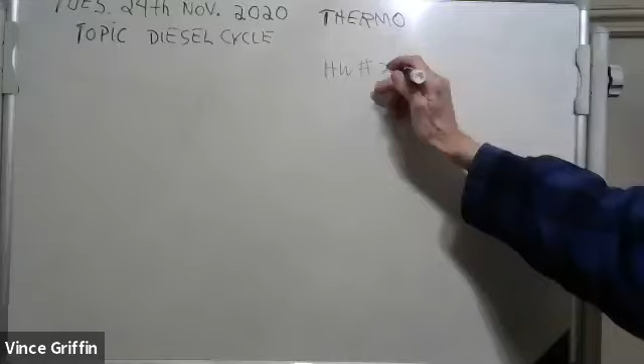Yeah, well, here's what I thought, there was a confusion about this. Homework number 24, I thought it was problem 917. And homework 25, I thought was 106E, 9106E. And problem 26, I don't know what happened.

I'm just not happy with doing this online stuff, I was a lot happier before we had to do stuff online. But that one was 965. I'm coping the best way I know how here. You just skip the homework number 24, that's it. But we still submit you the same homework, 917 and 106, but on a different homework number.

Okay, well, if you feel like you've been shortchanged, email me and we'll fix it. Okay, all right, anything else?

Okay, well, we're going to do a diesel cycle, but now which one? I wanted to do a diesel cycle. I'll tell you what it is. It's problem 10, chapter 10, 122E. That's what we're going to try to do.

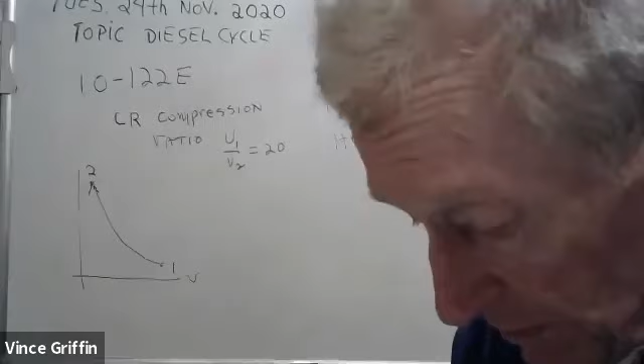Now remember, the diesel cycle, on a PV diagram, you want to start off here with your compression. This is your compression stroke. Use the numbers that they use in the book, this is how they do it, and if you change the numbers, you'll get me all confused, so just do it the way the book does it. There's your compression stroke, and this is the burn, it's an isobaric burn to state 3.

There's state 1. And then what you have is your power stroke. You get a little bit of power out of your burn, because that moves your piston some, and you get some power out of the burn there.

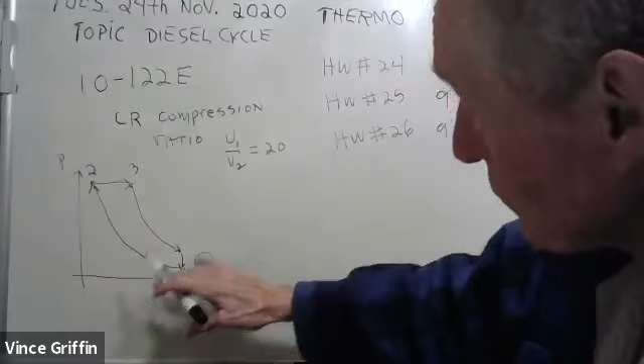See, on a diesel engine, you got a lot of compression. This is 20 to 1. V1 over V2 is 20 to 1. The compression really goes up, so much so that it heats it up and makes it hot, and that explodes the diesel. That's what makes the loud banging sound. When a diesel goes by, they're loud because it's exploding that diesel fuel.

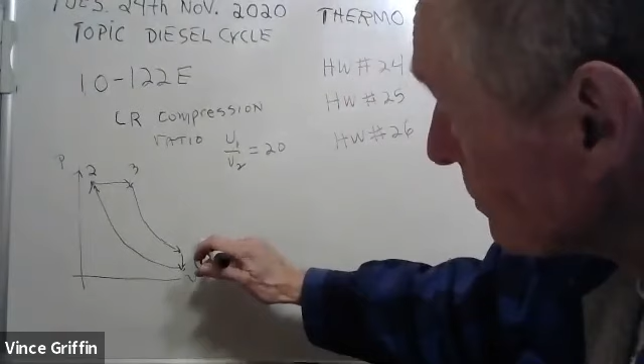And you have an isobar from 2 to 3, and then you have your power stroke. And then they model the exhaust intake as an isochore. This is the exhaust.

This is your power stroke. This is your burn. This is your compression. See, these two are adiabats. They're adiabats. These two are adiabats. This is an isobar. It's an isobar. And this here is an isochore.

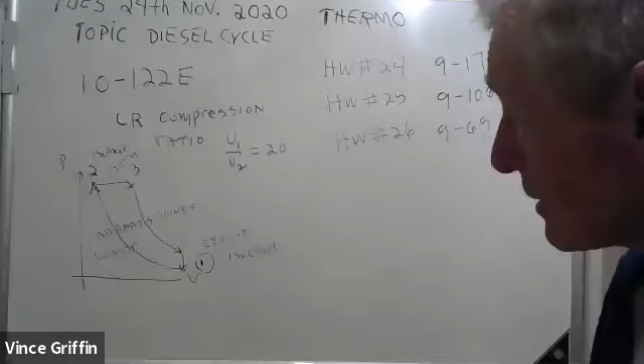So there's your diesel cycle. And we're going to read this. It's 10122E. And it says the inlet is 520 Rankine. Well, let's get some red here. If you drew the isotherms, that's 520 Rankine. We're in English now.

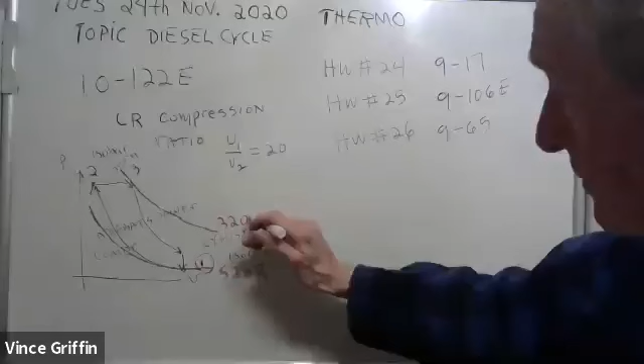And do you notice that the adiabat is steeper than the isotherm? Adiabats are steeper than isotherms. Write that down. And see, this here is your hottest temperature. And do they tell you what that is? Yeah, 3,200. This is 3,200.

Rankine. That's your hottest temperature. Let me keep reading here now. Maximum pressure, 920. They said the maximum pressure here is 920 PSI. So we've got our isobar there. The pressure will be the same at 2 and 3.

Well, that's about it, guys. We're ready to do our problem now. And what we're going to do, if you have any problem with these, email me. We'll figure it out. I need the space here.

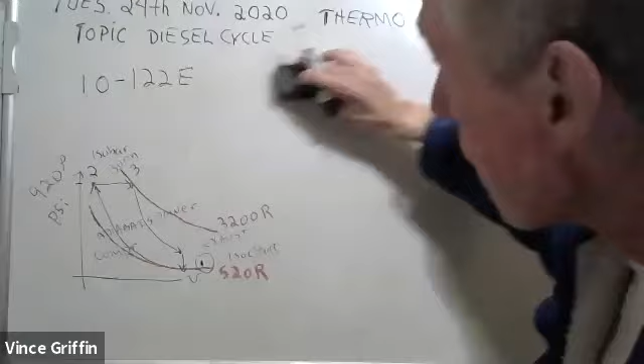We're going to make our table now. Here we go. We're going to have P, V, T, delta U, Q, and W. And we'll have process 1 to 2, 2 to 3, 3 to 4, and 4 back to 1. It's a cycle.

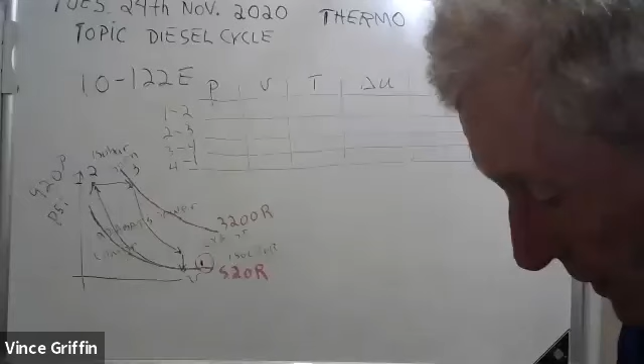And let's put the units in there because units are important. These are PSI. These are cubic feet per pound mass. We'll do these in Rankine. This will be BTUs per pound mass, BTUs per pound mass, BTUs per pound mass. And you all remember what a BTU is.

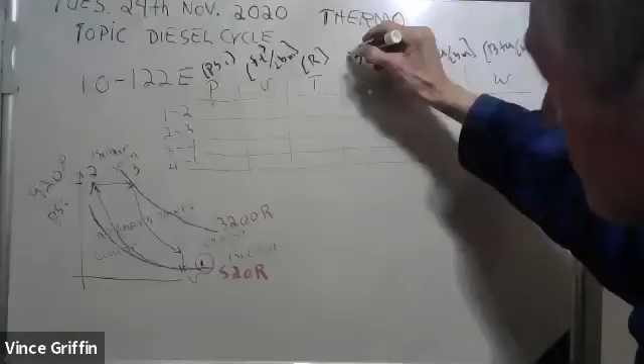A BTU is the amount of energy needed to heat 1 pound mass of water 1 degree Fahrenheit, or Rankine, same difference.

All right, well, some of this stuff is known. If you'll read what they said this is 920. The pressure at 2 is 920. See, these are all the initial values. Put a little I on all that if you want. The initial value of the pressure going from 1 to 2,

we don't know. Don't know what that is. They don't give it to you, do they? Let me read it again here. And we're doing 10-122E. No, they don't tell you. Well,

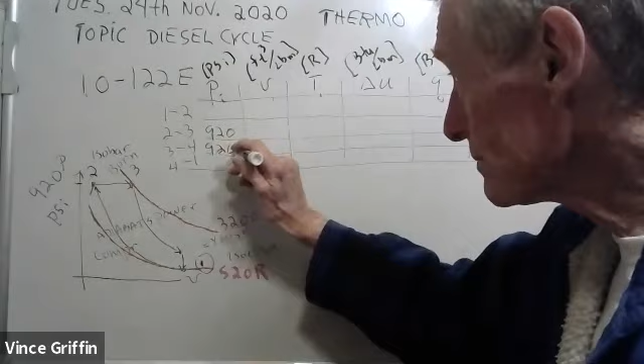they do tell you what the initial pressure going from 2 to 3 is. Going from 2 to 3, the initial pressure is 920. Okay, 920 PSI. Hey, you know what? The initial pressure going from 3 to 4 is also 920. There's your isobar. So we've got that.

Now, what else do we know? Hey, wait a minute. Going from 3 to 4, the initial temperature is 3200. So that goes right here, 3200 Rankine. Hey, looky here. P3V3 is equal to RT3. We can figure out V3.

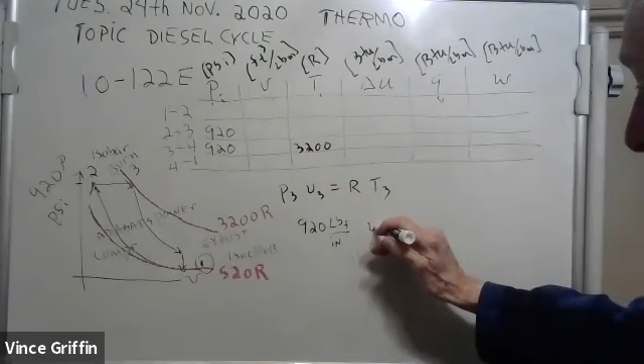Okay, well, let's put in our numbers and do it. So this is 920 pounds force per square inch. That's what a PSI is. And this V3 will be in cubic feet per pound mass.

Now the R is 53.34 foot-pounds force, pound mass Rankine. And the temperature at state 3 is 3200 Rankine. So look here, we know everything.

We can find V3. But there's a dirty little catch. If you forget this 144, you won't get the right answer. You got to go 144 square inches is a square foot. Then you'll get the right answer. All right, I'm going to shut up, and I want you to find V3 for me.

And then I'll call on somebody. Go for it.

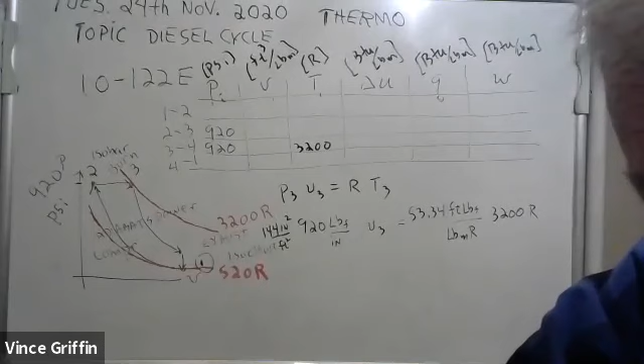Now let me go to my friend Alex. Alex, unmute and say hi, please. Hello. Hey, Alex, do you have this specific volume at state 3 for us? I got 1.28841. That's what I got. I got 1.288. That's probably enough accuracy there, Alex.

Now, I put it in the wrong place, though. I goofed up. It goes here. I goofed up here. But hey, I caught it. You don't get a thank you point when I catch it. You got to catch me.

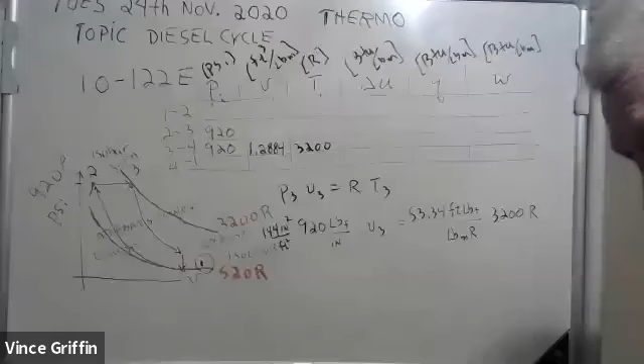There you go. Now we did good. We got that. Now what? Hey, what about these adiabats? I need to put some zeros in here. Let's pick on my friend Alex again. Alex, you did good on this little V here. Where do I put my zeros for my heat transfers, Alex?

Would it be at 1? Yeah, 1 to 2. See, going from 1 to 2, look here Alex, 1 to 2 is an adiabat. There's no heat transfer. What's the other one, Alex? 3 to 4. Yeah, it's going from 3 to 4. Good going.

Now, one of these work per masses is 0. Let's pick on somebody else. Braxton, unmute and say hi. Hello. Hey Braxton, one of these little work per mass deals here is 0.

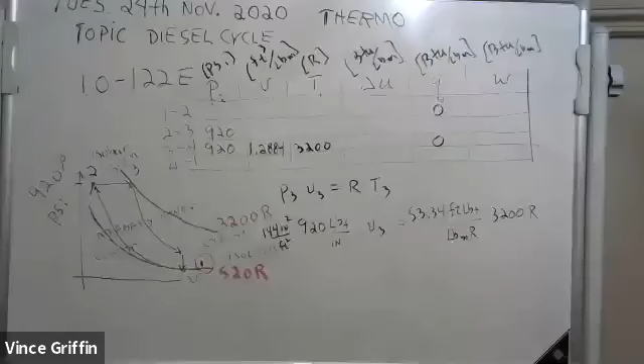Which one is it? I'm gonna guess 4-1. I like it. I forgot to put my 4 in there. There's state 4, and there's state 1, and there's no work done. Braxton, how come there's no work going on that?

Because it's exhausting, and on a PV diagram, I feel like you need to go left or right, and the work under it is. That's right. You got it. Yeah, exactly. You got to go left or right to get any work done, and it's just going straight down. It's called an isochore.

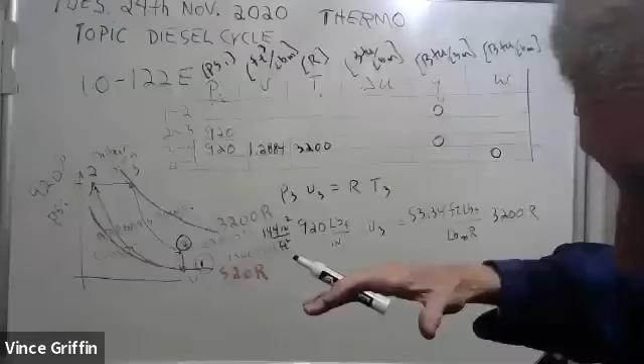The piston started and ended at the same spot, and we're treating it as an isochore, and so you get 0 work done. In reality, the engine really turns over physically 360 degrees because the piston comes up and you have your exhaust, and the exhaust goes out, blows some smoke out there, and it stinks. And then the piston goes down and it sucks in some diesel fuel. But we're treating it as if it's an isochore. Thermodynamically, it's an isochore. Physically, it's not.

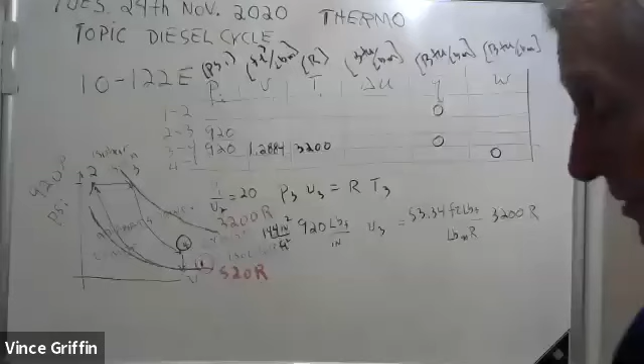Okay, well, we're coming right along. Now, they said V1 over V2 is 20. Is that going to help us any? Let me write that down. That's called the compression ratio. Nah, that's not going to help us any because we don't know V1 or V2. Never mind that, it was just a thought.

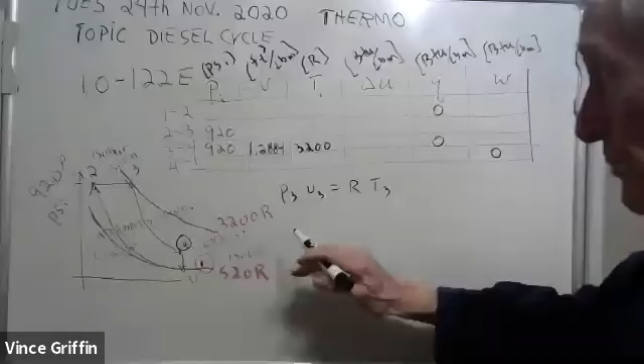But let's see. At state 3, we've got an adiabat to state 4. So we can use an equation that we know and love. I need to make some room here. We're doing an ideal diesel cycle. We're assuming each process is reversible. And this is an adiabat, or reversible adiabat. And reversible adiabats have a special name.

And I'm going to call on one of my excellent students here. We've had this before, but you might have forgotten. Brian, unmute Brian and say hello, please. Hello. Hey Brian, there's a special name for reversible adiabats. What is it? It's something like ison. You got it. By Jove, he's got it. It's isentrope. Okay, and what it means is the delta S is 0.

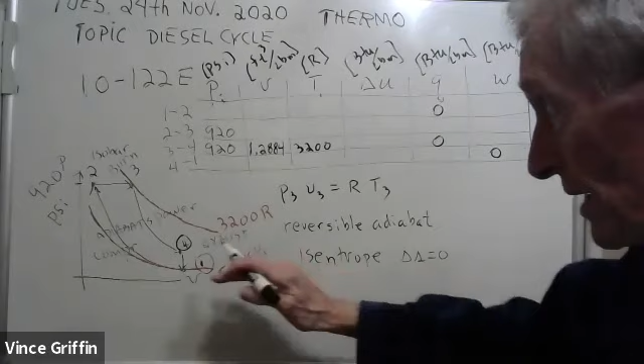Delta S is 0. Well, so what? There's no S's on here. But wait a minute, we've got an equation for isentropes. If you have an ideal gas, and did you know we're dealing with air basically? So T4 over T3 is equal to P4 over P3 to the K minus 1 over K, which is equal to V3 over V4.

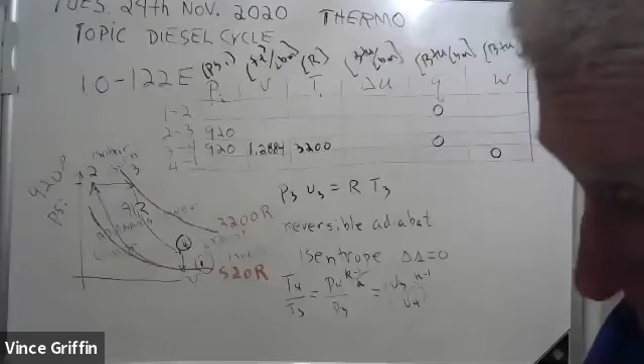If you don't have this equation written down someplace, write it down. It's a nice equation, but be careful. It only works for an isentropic ideal gas, which we have. We've got an ideal gas. It's air. At these temperatures, air behaves nicely.

Now, do we know T3? We do. Do we know T4? No, we don't. Do we know P3? Yeah, hey, we know P3. Do we know P4? We don't. Do we know V3? Hey, we know V3 and we know K, right? We can look it up. Do we know V4? We don't.

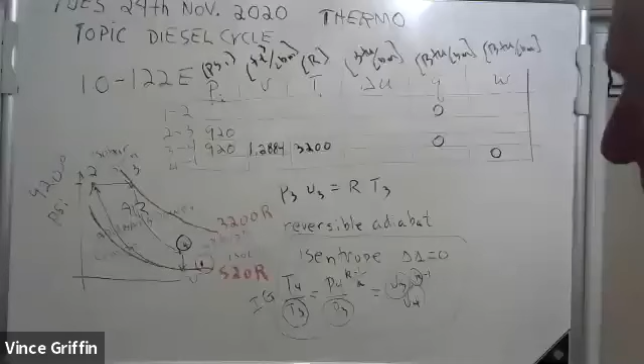Too bad, it was a nice idea, but I don't think we have enough information to solve that equation. We're just up a creek. You guys got any ideas? I'm going to take a drink of water here. We're stuck right now, aren't we? We need to fill in those boxes.

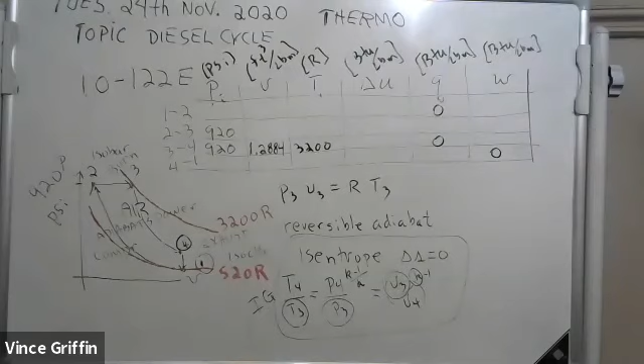Is 1 and 2 at the same temperature? No, 1 is at 520 and 2 will be at a different temperature. Can you tell? It's going to be somewhere in between these two red lines. Yeah. Nope. But thanks for asking, it was a nice thought. But no, that didn't seem to work. Well, we just seem to have a huge problem here.

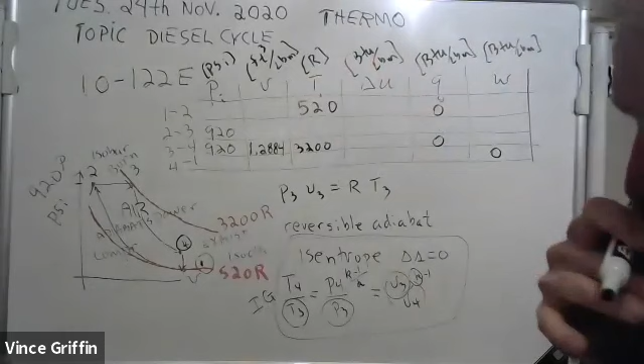Hey, I got this brilliant idea. See, when I think of an idea, it's brilliant. Aren't you the same way? Look here. Let's try this same little trick here, but let's go from 1 to 2.

T2 over T1 equals P2 over P1, to the K minus 1 over K, equals V1 over V2 to the K minus 1.

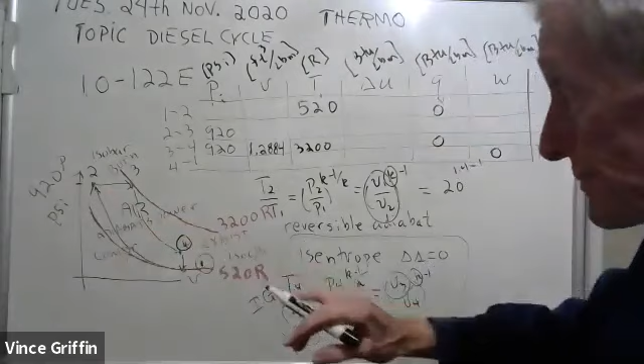One of my excellent students asked about T2. We don't know what it is, but we know what T1 is. It's 520, so put it in. Here we go, 520 Rankine.

Okay, now look, we got an equation. There's only one unknown. We're going to find T2. Here it comes, I'm going to shut up. I'll give you a minute and a half if you need it. Find T2, go for it.

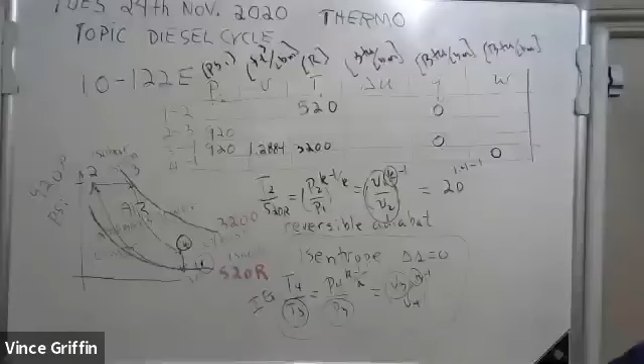Well, I think I've got T2. Let me go to one of my excellent students here. Bryce, unmute and say hello, please. Hey Bryce, did you get T2 from this equation yet? I believe I did. What'd you get? 1723.516 Rankine. That's exactly what I got.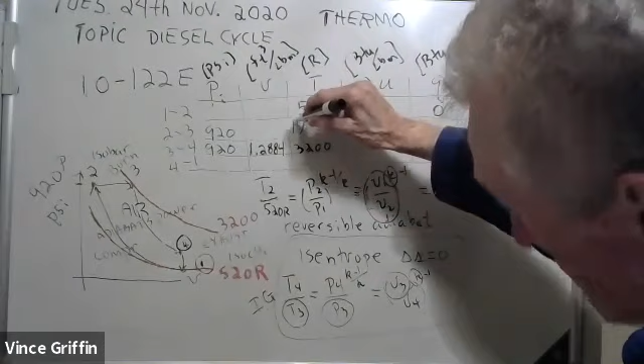I got 17... oh come on, I'm in a little trouble here. Here we go. 17, 23. Did you say 23? 1723? Yes sir, Bryce? Yeah, that's what I got. I got 1723.9 Rankine. And I want to know if anybody else got that, say if you did.

There's one, I heard one. Okay, now what we're going to do is we're going to find little v2. I could write it out for you, but you don't need me to. You know how to, if you know the pressure and the temperature, you can find the specific volume. I'm going to do it, you do it. Find V2, go for it. You got a minute and a half if you need it.

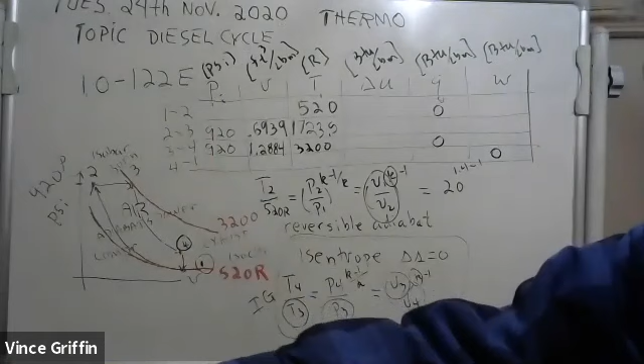All right, now guys, I need the room here, let me make some room. They said this is going to be neat. They said that V1 over V2 is 20. They call that the compression ratio. Well, look here, if you know V2 and you know 20, well we can figure V1. Okay, go ahead, find V1 for me, go for it.

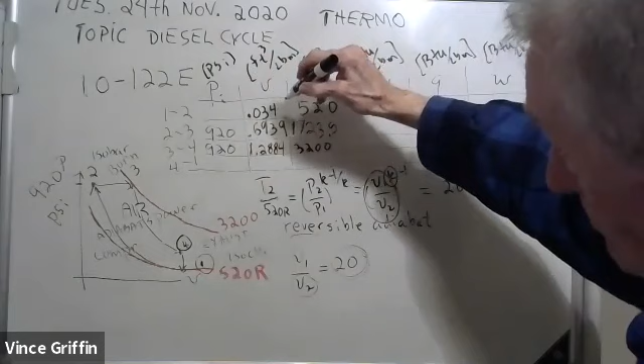Did you get 0.03469? You can make it, let's just round it off to 0.0347, that'd be good enough for me. If you got that, say uh-huh. Didn't get that? Was that a yes? No, I didn't get that number. I did not.

Well, I could be wrong, guys, I could be wrong. Here, let me... to get V I get 13.881. Oh, I'm wrong, and you guys are right. I am wrong, and you guys spoke up, I'm proud of you.

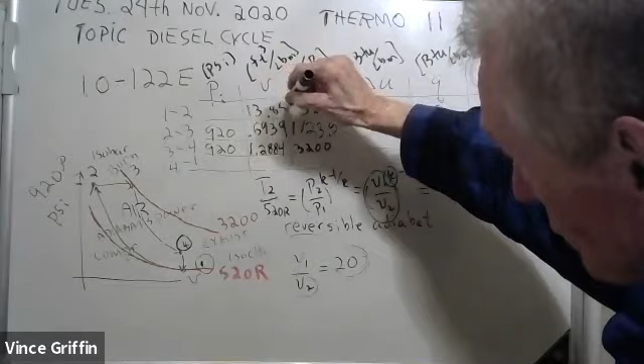Okay, let me do it again. How about 13? How about 13? I did it backwards, guys, I goofed up. How about 13.88? Yeah, are you happier now? Yeah, that's what we got. Good, I appreciate you guys. I think I did it upside down.

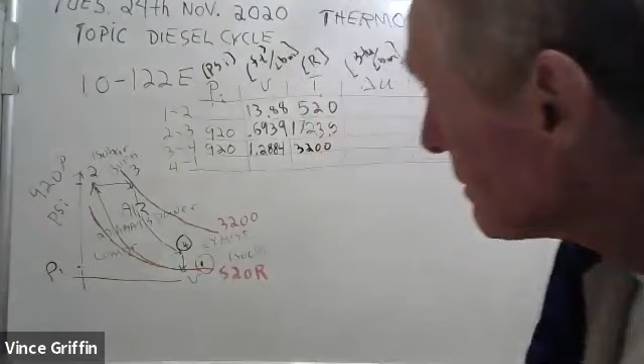Okay, now we're going to find the pressure. Now let me make some room here. We're doing great, we're going to find the pressure now. At state 2 — oh wait, no, wait a minute. No, wait, no, this is the pressure — I'm getting confused. Oh no, we're trying to find the pressure at state 1. That's way the heck over here someplace. The pressure at state 1. Well, we can get it, you know how to do it.

P1 V1 is equal to R T1. And see, we know V1, we know R for air, we know T1. I'll shut up, I'll let you get it. Don't forget the 144, though.

I got a value for P1, but I'm going to call on somebody. Let me call on my friend Nicholas Sabrata.

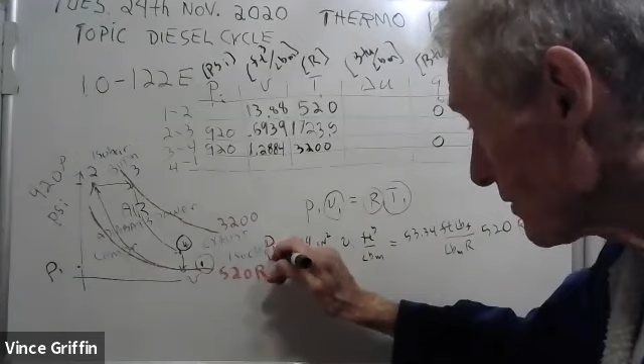We're missing the pressure. Oh yeah, I'm missing the pressure. Here's the pressure, and see what that is, pound force per square inch. The inches cancel, and you'll have foot pounds because there'll be a foot left up here times the pound. You'll have foot pounds per pound mass on the left, foot pounds per pound mass on the right.

So to answer Nicholas's question, Nicholas, to find this V, you're going to have to divide. Okay, I found P1. What'd you get?

13.88. That's what I got. Good going. We got the P1. It's 13.88 PSI.

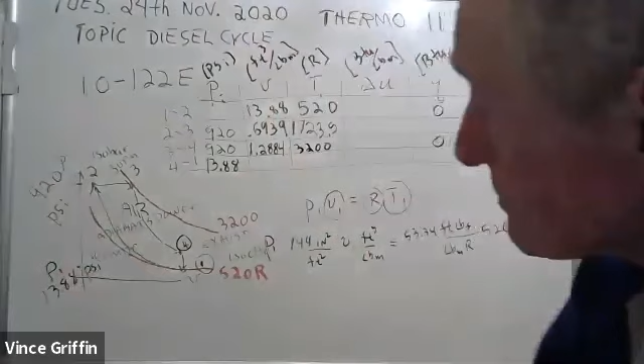All right, now what? Well, we seem to be missing a few things. Professor, you put the P1 in P4. There's another thank you point. Now, who was it that just helped me?

This is Nicholas. Nicholas Sabrata? Yes, sir. Good going, Nicholas. You are now in the elite group of people with thank you points. It's like a club. Good going.

Now, wait a minute. You know what's really weird? But I think it's correct. I think these are both 13.88. I think we did them correct. But see, this is PSI, and this is cubic feet per pound mass. But those answers are correct. It's just one of those strange coincidences in life.

Hey, we're doing great, but hey, we don't have these yet. You guys have any brilliant ideas on how we're going to get those?

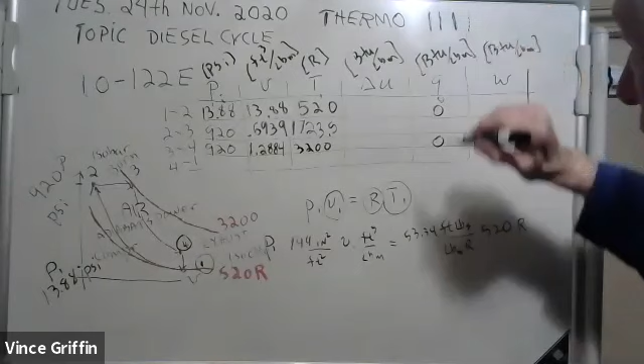At 4-1, you can put 13.88. Oh, I love it. Now who was that? That was Bryce. Bryce, I'm going to give you kind of a dash thank you point. I didn't make a mistake, but Bryce has helped us see that 4 and 1 have the same specific volume. So it should be 13.88, right, Bryce?

Yes, the specific volume should be the same. Hey, that helps a bunch. Hey, Bryce, as long as you're coming up with these great ideas, any ideas for these?

Let me think. So the... oh, no.

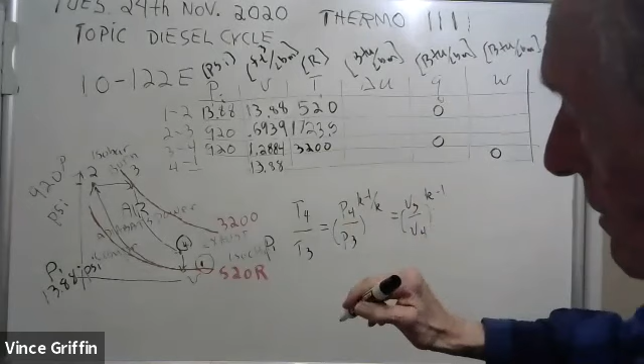Hey, Bryce, I got an idea. Check this out. Now, we had this up here earlier, but we didn't have enough info. But maybe we do now. Let's look and see. Let's look and see if we got enough info to do it now. Now we've got T3.

Do we have P3? Do we have P4? No, we don't. Do we have T4? No, we don't. Do we have V3 and V4? Looky here, looky here. We have V3 and we have V4. I think we can do this.

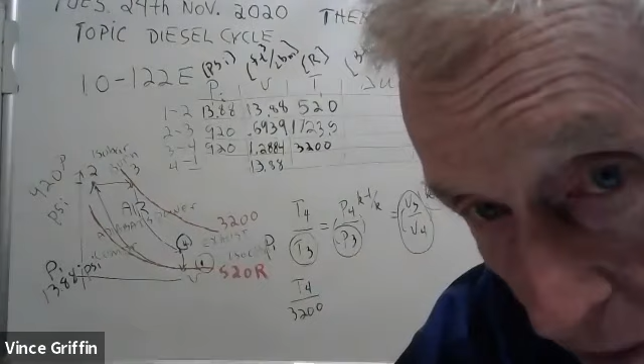Let's put in our numbers. T4 over T3, which is 3200. Does that show up? Pretty good. Equals V3, which is 1.2884. V4 is 13.88. To the 1.4 minus 1. Okay, solve for T4. I'll be quiet.

Okay, well, I've got what I think is T4. I wonder... Julian, let me pick on Julian. Julian, unmute and say hello, please, Julian. Hello. Hey, Julian, do you have this T4 for us?

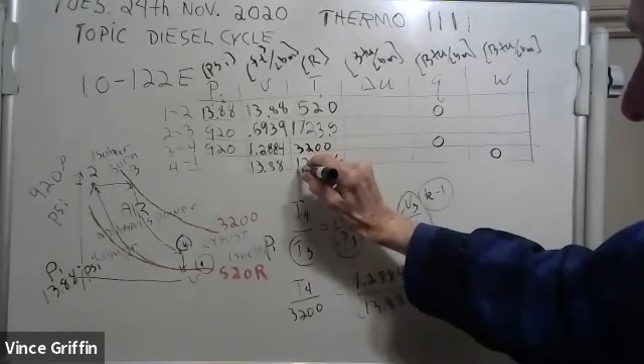I'm getting 1236.56. That's what I'm getting. Oh, come on now, 1236. Hey, we'll just round it off to 6. Hey, look at here, we have V and T. We can get the P now.

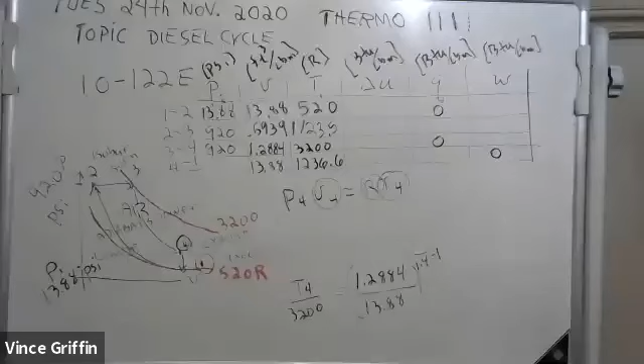Let's do that. Let me make some room here. P4 V4 equals R T4. And see, we know T4, we know R, and we know V4. We should be able to get P4. All right, I'll shut up. I want to see if you can do it. Go for it.

Don't forget the 144. Well, I got an answer. I got 33.0 PSI. If you got that, say uh-huh. Uh-huh. Well, there's two of us. That's good.

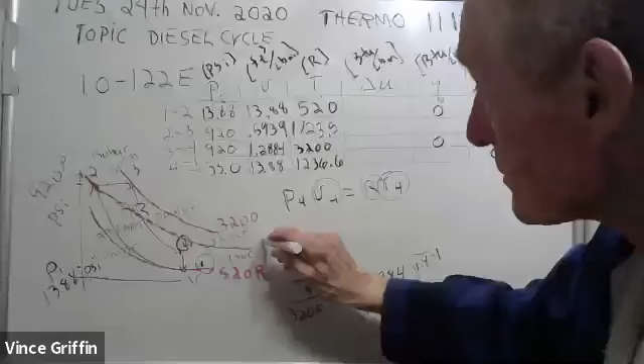Well, let me put in my isotherms. I need to finish drawing my PV diagram. We now know that the temperature at 2 is 1723.5 Rankine. Now the temperature at 4 is 1236.6 Rankine. Now we have all of our temperatures in there.

We're doing great. Now let's get these little delta U things, our change in specific internal energy. Now, how do you do that? Well, there's a nice equation that goes like this that we all know and love.

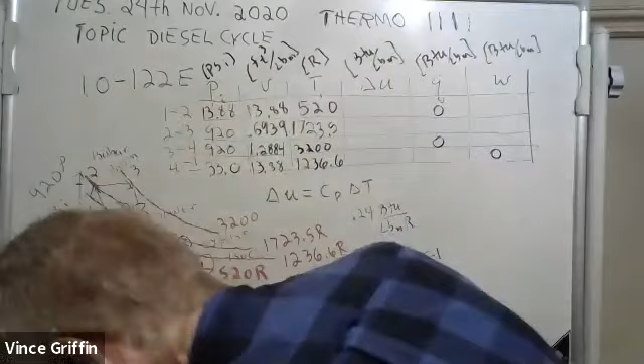The only thing is, what's C sub P in English, senor? I think it's 0.24, but maybe we should look it up. Go to the back and look up C sub P for air in English. Well, I'm trying to find it here. C sub P.

We're doing air. By Jove, that's right. From memory, I got that right. How about that? My memory is still okay. I don't need to go to a rest home yet.

Now, what's the change in temperature? If you're going from 1 to 2, then what is the difference in temperature? Got hotter. Okay, well, we can do that.

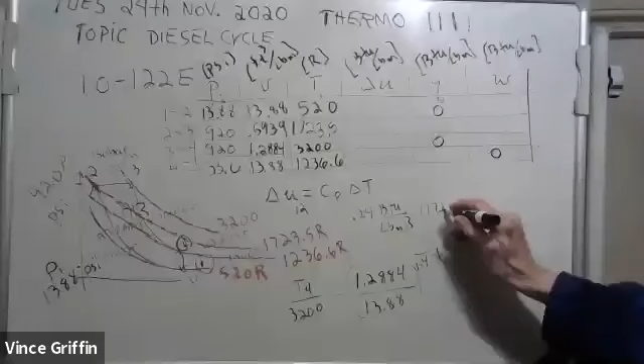From one to 2, well, you're going to have to subtract these. You know what you're going to have to do? You're going to have to go 1723.5 minus 520 Rankine.

Do I hear rain going on outside? Is it raining at your house? Is that my imagination? I think I hear rain.

Okay, well, let's do it. Here goes. 0.24 times 1723.5 minus 520. Well, I got an answer for delta U. I'm getting 288.8 BTUs per pound mass. How about you?

And see, now we can get the work done going from 1 to 2. Now, how do you do that? Well, you could use the first law. See, we're treating it as a control mass. It's like a piston cylinder. We're really lying to you because there is some valves and stuff comes in and out, but we're treating it as a control mass where you're just transferring heat in and out.

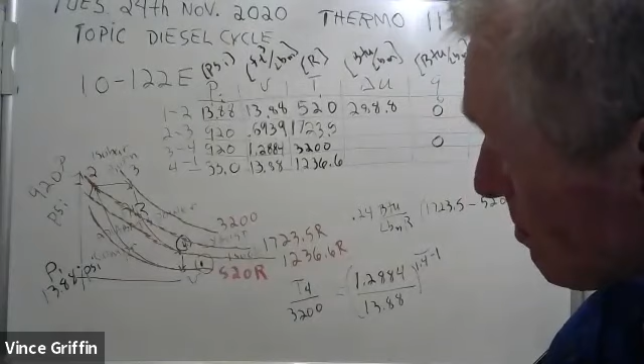But the first law says for control mass, look here, from 1 to 2, if you're going to go from 1 to 2, we have the delta U. Isn't that nice? And we have the Q. Hey, we should be able to get the work done.

I'm getting a negative 288.8. How come it's negative? How come it's negative going from 1 to 2? Let's see if somebody can tell me that. How about my friend Nathan? Nathan, unmute and tell the class why the work per mass is negative going from 1 to 2.

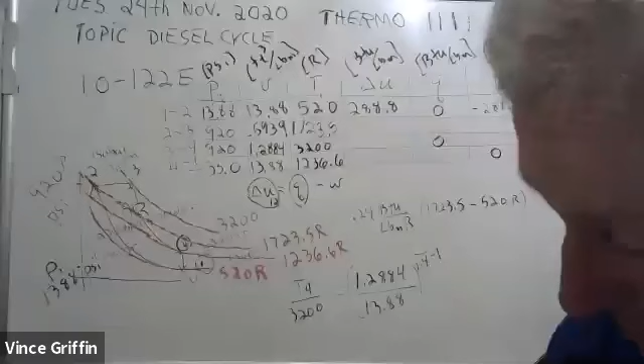Well, the change in volume is negative. I guess you could look at it that way, but it's leaving. That's good enough. Now the answer I wanted, you know how teachers want to hear the answer they want? Yeah. The answer I wanted was it's compression, and compression work is negative. Can I try that again? It's compression. Yeah. By Jove, he's got it. He's catching on. He's catching on.

Now see, expansion work is positive and compression work is negative. Have I ever told you that before? Yes. Oh yeah, I've told you. Well, let me tell you again. Compression work is negative. Expansion work is positive. Maybe I'll need to tell you another time or two. We'll get it eventually. Okay, next.

What are we going to do next? Well, I don't know. Well, let's get this one. This here, we got to go back to that same equation we just used. Delta U from 2 to 3 is equal to C sub P. So that's that 0.240 times delta T from 2 to 3. Go ahead, get that. I'm going to do it, and we'll put that in. Here goes.

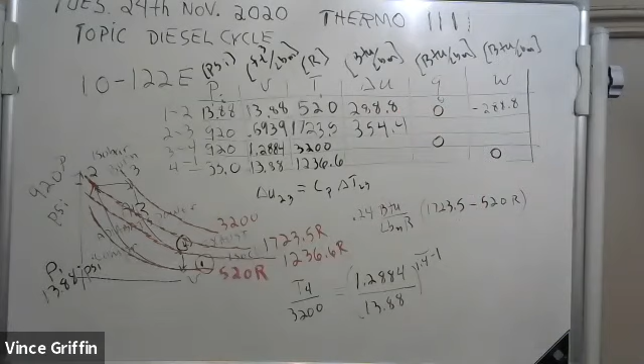I got a different number when I did this before. Let me do it again. Maybe I did something wrong. 354. No, that's what I'm getting. 354.

Anybody getting that? Yes, I'm getting the same. Yeah, that's what I got. We're doing great. Hey, now, oh, wait a minute. Now, we don't know either one of these.

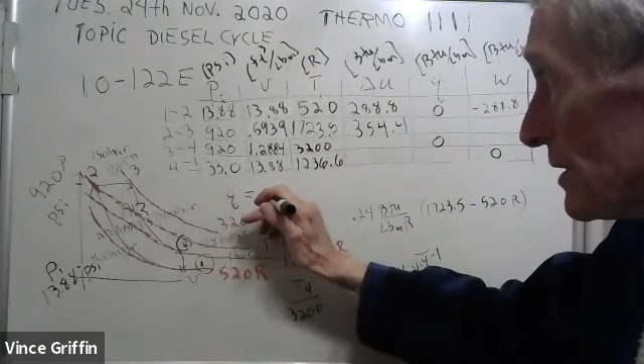There's two ways to get those. Let's do it both ways, shall we? We'll do it both ways. Now, one way is to get this Q. This is an isobar. And the Q for an isobar is equal to your delta H. Have I told you that?

Yeah, I've told you that. And delta H is equal to C sub P delta T. Right?

Now, wait a minute. Oh, God. Did I do the wrong one here? Yeah, this is wrong. Let me get this right, guys. I gave you some wrong stuff. Delta U is equal to C sub V delta T. What I just did was delta H. That's C sub P delta T.

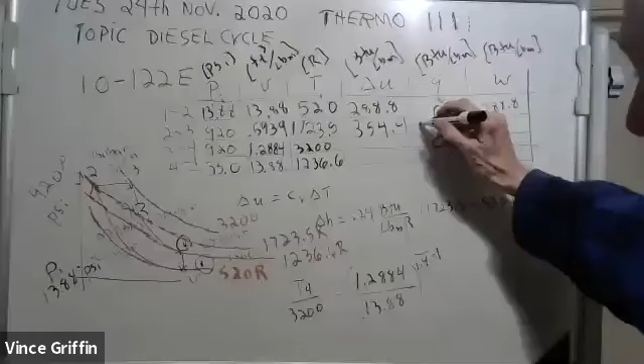Now we got the right answer for delta H, and that's equal to the Q. We just did the Q, but the delta U, that's C sub V delta T. Now C sub V is 0.171 if you look it up in the back. And the delta T is the same as it was before.

It's 1723 minus 520, right? We're going from 1 to 2, aren't we? Yeah, we're going from 1 to 2. And so do that for me and we'll get the delta U. I did it wrong, but I found it there. I think we'll be okay. We can check it.

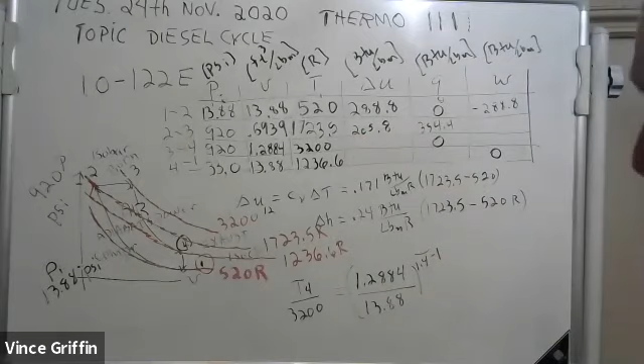205.8. Anybody getting that? I hope so. Uh-huh. Was that an uh-huh? Uh-huh.

Oh good. Now here I'm going to check it, to make sure we did this right. Little W from 1 to 2, that's just the area underneath this graph. You guys know that. Here, let me color it, I'll color that area green.

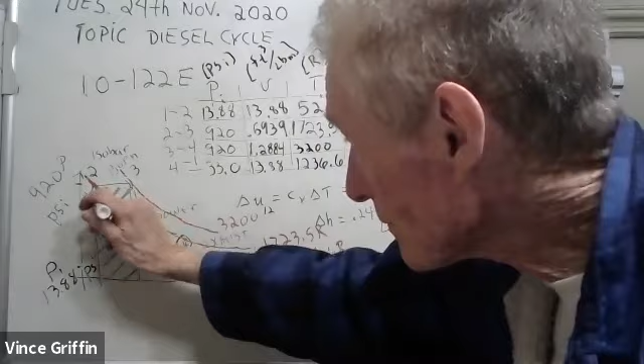You know that the work done is the area under your graph. Would that not be... is that not the area from 2 to 3? Oh no, wait a minute. Yeah, that would be the area from 2 to 3. I'm sorry, what are you telling me? You just wrote work from 1 to 2, but it's fine. Oh, I want 2 to 3.

Now, who was it that just spoke up? Bryce. Bryce, you just got yourself a thank you point. Is that your second one today? I got a dashed line the first time, so. Oh yeah, well this one here is for real, man. I made a mistake. See, when I make a mistake, you get a nice big thick real one. You just helped us on that other thing.

Now we're going to get the area of this, and that's the work done. Okay let's do it. They teach you in calculus that the area under your graph is equal to the integral, right? Well what's that area equal to? It's just base times the height. It's just a rectangle. Now the height is 920

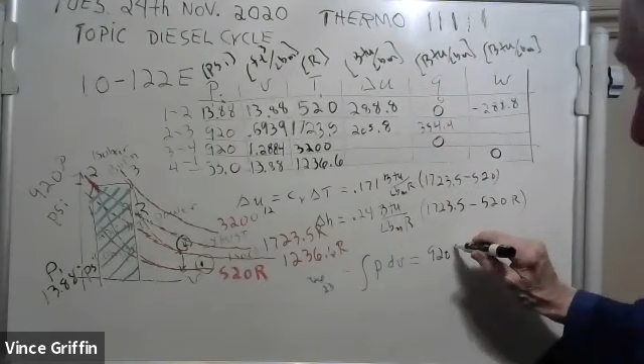psi, pounds force per square inch. And the width of the rectangle, well that's just V2 minus V1. You know what that is? That's a point. No, it's V3, we're doing 2 to 3. It's 1.2884 minus 0.6939.

Isn't that how you do rectangles? Base times height? I do that, and we'll get our work from 2 to 3. Here it goes. Now wait a minute, though.

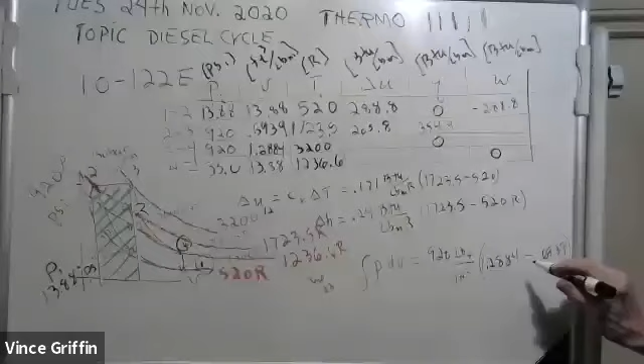You know what these are? These are cubic feet per pound mass. You're going to have to multiply this by 144 to get rid of the square inches. Do that, multiply by 144, and we'll have our, right?

I ran out of room there, that's my problem. Those are cubic feet per pound mass, aren't they? Now I'm getting mixed up, guys. Just a minute here. No, I think we're okay. I think we're going to get foot-pounds. I think we're going to get foot-pounds per pound mass.

But if you want BTUs per pound mass, you're going to have to divide. I don't have enough room, that's my problem. You're going to have to divide this by 778 to get the BTUs. Okay, that times this here, multiply 144 divided by 778. Let's see what happens.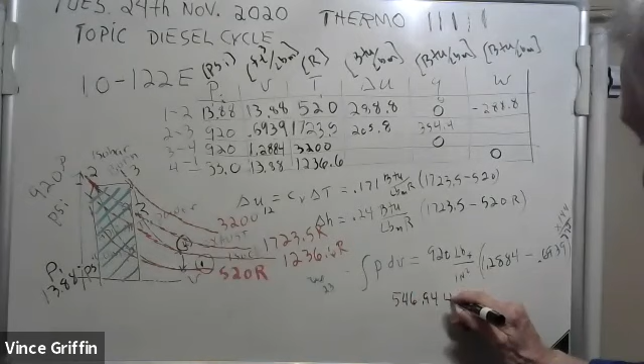Here, let me write it here so you can see it better. I did all of this, and what I'm getting is 546.94 pound force square inches times cubic feet per pound mass.

And see, you have to multiply it by 144 square inches per square foot and divide it by, a BTU is 778.16 foot-pounds force. There, I barely have enough room to write it. Okay, so here we go. I got an answer. I got my work to be 101.1 BTUs per pound mass.

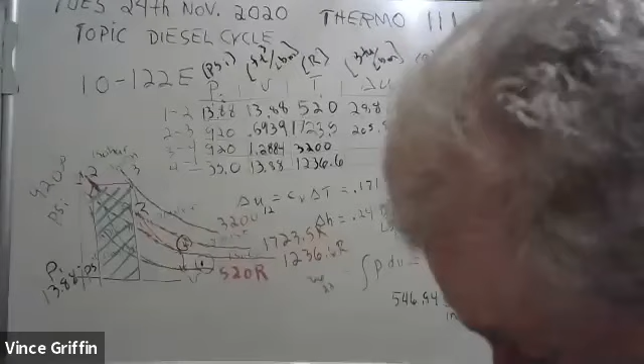Anybody getting that? Yes sir. Now here's the proof. Was that a yes? Yes, yes. Good, and here's the proof of the pudding. If you subtract these, do you get 205.8? According to the first law, you should. Delta U should equal Q minus W.

Well let me try it. 354.4 minus 101.1. Must have done something wrong. 354.4 minus 101.1. I don't get that. Something bad happened.

I think your delta U is wrong. Let me do the delta U again. Now who am I talking to? This is Braxton. Okay Braxton, my delta U should be, I think I have the right numbers here. I think you're using from 1 to 2 instead of 2 to 3. We're trying to do 2 to 3, aren't we, Braxton? Uh-huh. Braxton, I appreciate you so much.

Something was bad, I know that. And so this should be, let's get it right. This should be 3,200 minus 1723.5. Okay, alright, here goes.

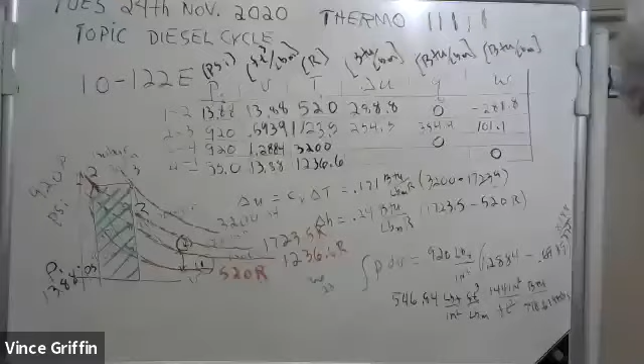254.5. Now if you subtract 354.4, well I got 101 point something. It's a little off. It's a little off, but I think we're okay. You take this minus that, 354.4 minus 101.1, 253.

I'm off just a tad here. I wonder what I did when I did this. No, those are the right numbers. They're a little bit off, but I can't help it. They're not much off, I think it's a round-off problem.

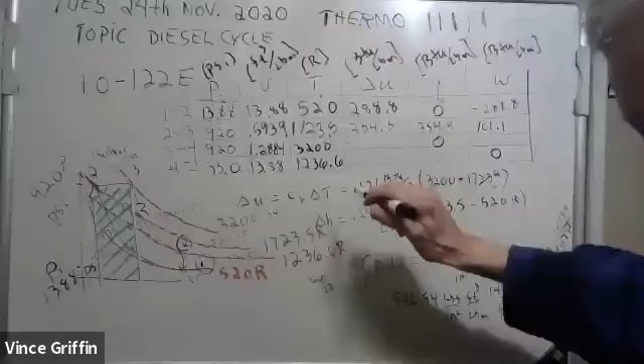Okay, well let's finish this off. Delta U here should be 0.171 times this difference here. Let me do that. 1236.6 minus 3,200, times 0.171. Going from 3 to 4, I'm getting a negative 335.7.

And now the work, I'm so disgusted with these things. Maybe this red one works better. Let's try it.

335.7, that's negative, so this work comes out plus 335.7. Going from 3 to 4, it's positive work, you're expanding. And then here you have to subtract, going from 4 to 1, you have to take the 520 and subtract the 1236.6.

I am getting negative 716.6. Wonder if I did that right. That looks right.

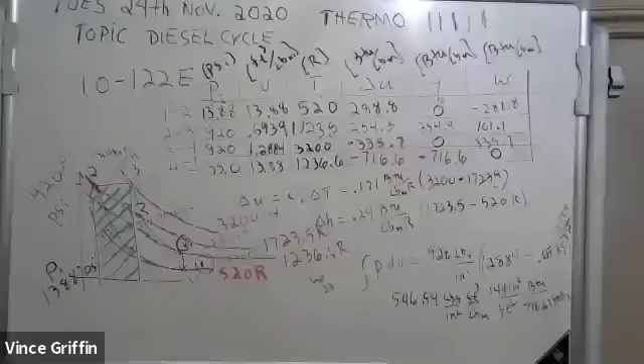And so what is the Q going from 4 to 1? Well, it should be a negative 7. It's exhaust, that's what's happening, you're heating up Oklahoma. Okay, now let's add these up.

When you add these up, they're supposed to be the same. Let's see if you do. I'm adding all these up now. Well, I got 148 when I added all that stuff up. Now I'm going to add this stuff up and see what happens.

Something really bad happened. I didn't get the delta U as minus 716.6. I'm getting minus 122.53.

Okay, that's what I had too. Let me do — that's Mohammed and another wonderful student helping me out. This is wrong. Let me do it again.

Now to get the delta U, you go 0.171 and you multiply the difference between 4 and 1, which is 1236.6 minus 520. Oh, I think I see my problem. I forgot to multiply by the 0.171. It's a negative 122.5. Is that better, Mohammed?

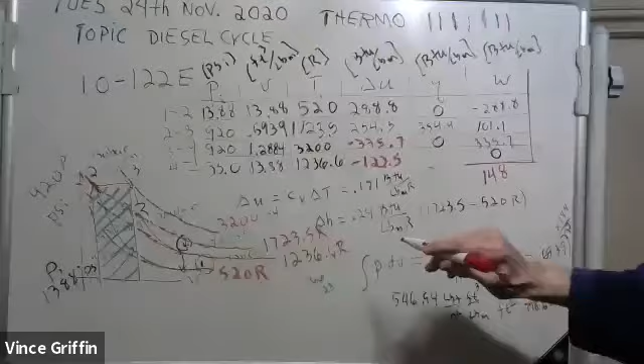Yes, sir. Good. And so this, going from 4 to 1, would be a negative 122.5. Now we're going to add these and see what we get.

Okay, 354.4. Well, that still doesn't work out right. I got a different U for 1 to 2. We originally did it with the CP value of 0.24, and I did it with 0.171 and got 205.8.

You know what, it is 205. Well, I got 205.8 when I did this last night. What would you get? I got 205.8. Thank you. Who is that I'm talking to?

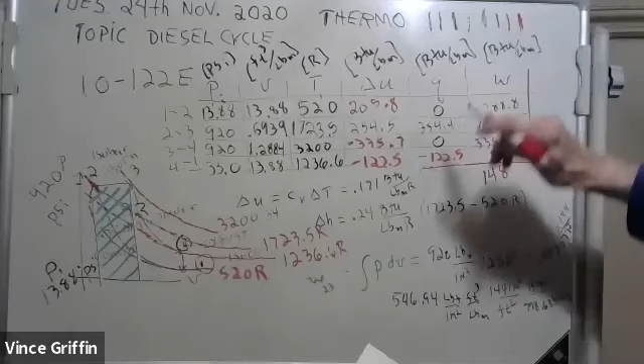Alex. Alex, you're on the board. I'm proud of you, you did good. And so this should be a negative 205.8, shouldn't it?

Now let's add this stuff up and see what happens. Here goes, this is the proof of the pudding. I'm getting 129.9. Now I'm going to add that stuff up.

No, it's still not working, guys. It's still not working. When I added up the work, I got 231.18. Well, this here is 231.9. My problem is I can't add.

Let me try again. And who was that just talked to me? That was Alex again. Well, this time I'm getting 129.9. Is that what you got, Alex?

I keep getting a 231.18. Okay, well let me try one more time. It's just 335.75 plus the 101. Yeah, I keep getting 231.

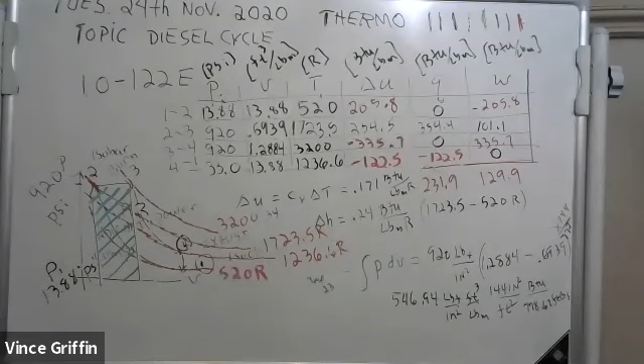Hey, I'm getting 231 this time. This is starting to look a little better. I'm still off a tad, but we're okay.

Let me show you one last thing, we have 2 minutes, and that is the efficiency. I just need some room to do that.

These are supposed to be the same here, guys. I erased that, doggone it. But they're pretty close to 231 there.

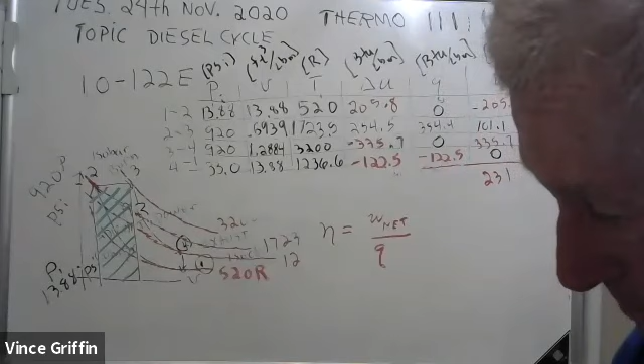The efficiency is the net work divided by this heat transfer that you gotta buy some diesel fuel. It costs money, you know, they don't give it away. And that diesel fuel is this 354.

And the net work — we differed, some of us, because I kept goofing up a little bit, but it's awfully close to that. And so the efficiency is 65%. Now, that does not mean you're going to really get a 65% diesel engine, because this one, we're assuming it just runs reversibly, no friction.

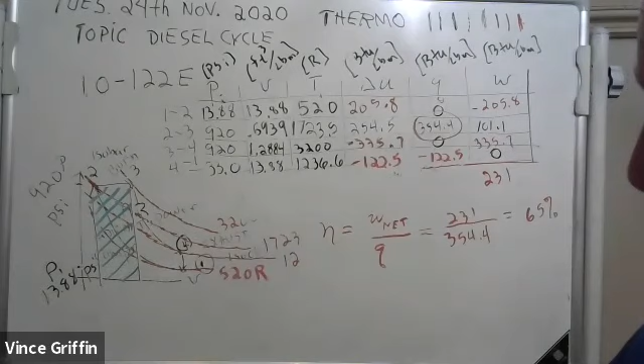Well, I showed you how to do it. I also showed you how to add and subtract incorrectly. I hope you can forgive me, but we can, if we're determined enough and stubborn enough, we can get the right answers. And I think we did pretty good finally.